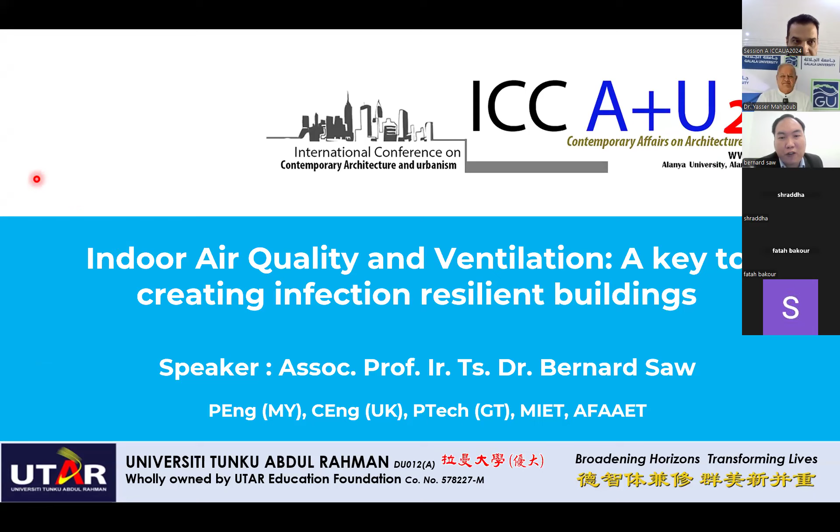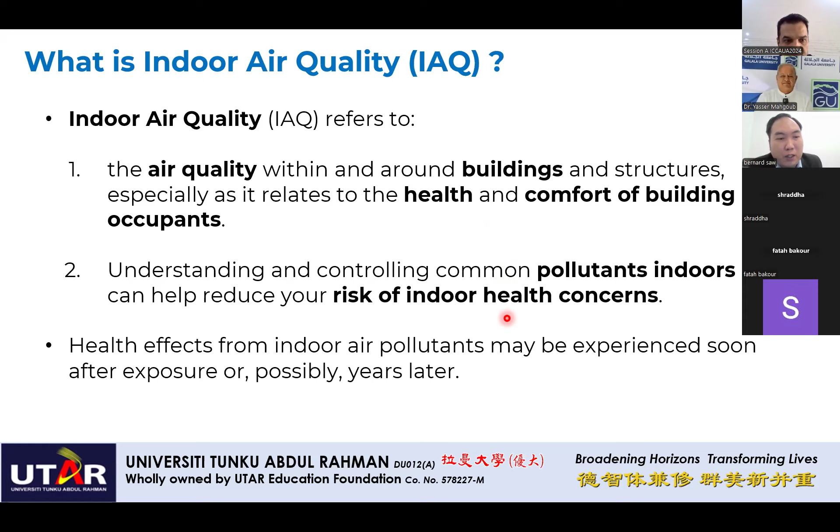Okay, so what is so-called IAQ? IAQ refers to indoor air quality. It's the air quality within or around buildings and structures, especially related to the health and comfort of the building occupants. So it's very important for us to understand and control the common pollutants present indoors to reduce the risk of indoor health concerns. The health effects from indoor air pollutants may be experienced soon after exposure or possibly years later.

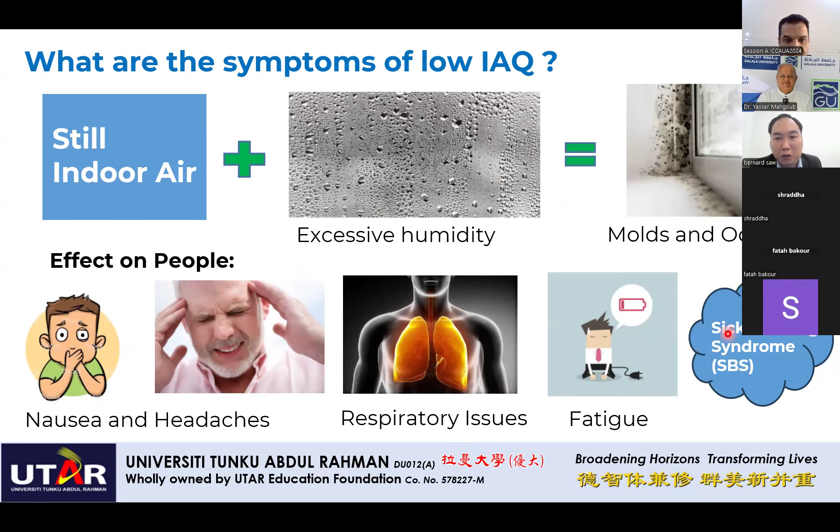So this is a typical example of low IAQ which happened in my country. You have still indoor air, then you add excessive humidity, and you find that mold and odor grow in the building. Subsequently you feel headache, nausea, respiratory issues, fatigue, and some people may experience so-called sick building syndrome. It means you don't have any health issue, but you stay for a long time in a certain place in the building, and after that you develop health issues. That we call sick building syndrome.

Why is IAQ so important? People spend about 90% of their time indoors. And indoors, humans are exposed to air pollution about 2 to 5 times more than outdoors. So it's very important for us to have good indoor air quality to improve workplace productivity, reduce absenteeism of workers and upgrade the investment. There is also a correlation between indoor air quality and low productivity and dissatisfaction among workers.

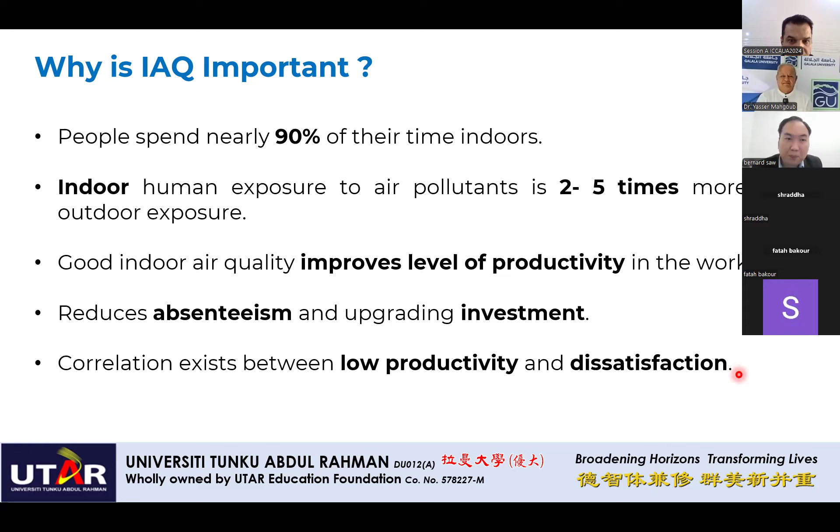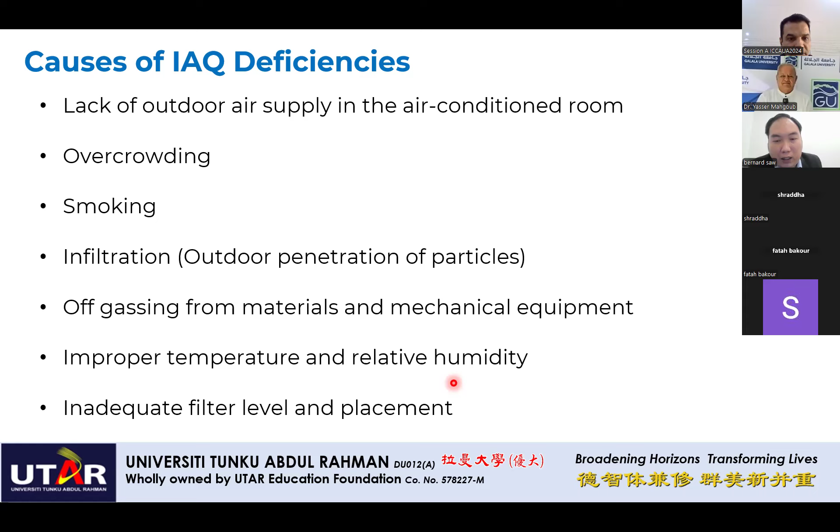So the real causes of low IAQ are lack of outdoor air supply in the air-conditioned room, overcrowding, smoking, infiltration, and off-gassing from materials and mechanical equipment, which typically happens when you have new furniture in your office or home. Improper temperature control, either too cold or too hot, then you lose control of humidity, which leads to the growth of fungus and mold. And inadequate filter level and placement.

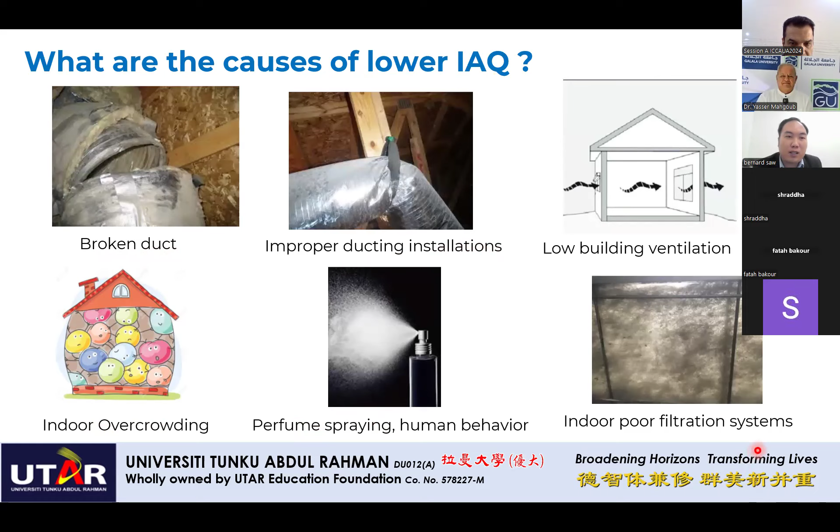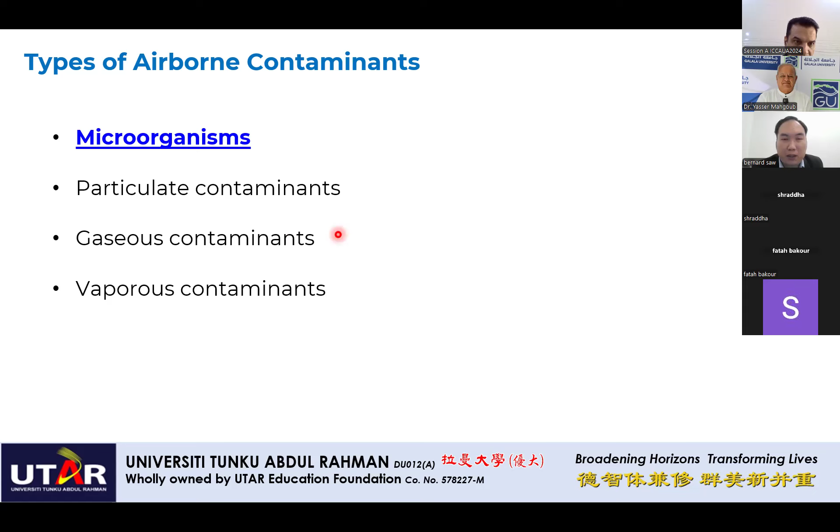These are typical low IAQ cases we found doing building inspections: broken ducts, improper duct installation, low building ventilation, indoor overcrowding, perfume spraying, human behavior, and poor indoor filtration systems. There are various types of airborne contamination: microorganisms, particulate contaminants, gaseous contaminants, and vaporous contaminants. Today our highlight is on microorganisms.

So what are microorganisms? They are usually viruses, bacteria, and fungi. Various types of viruses include influenza, coronavirus, SARS-CoV-2, the common cold virus, and mumps. Bacteria include tuberculosis, which we call TB bacteria, or pneumonic plague. Fungi usually result in mold on the wall, ceiling, and the attic of the house.

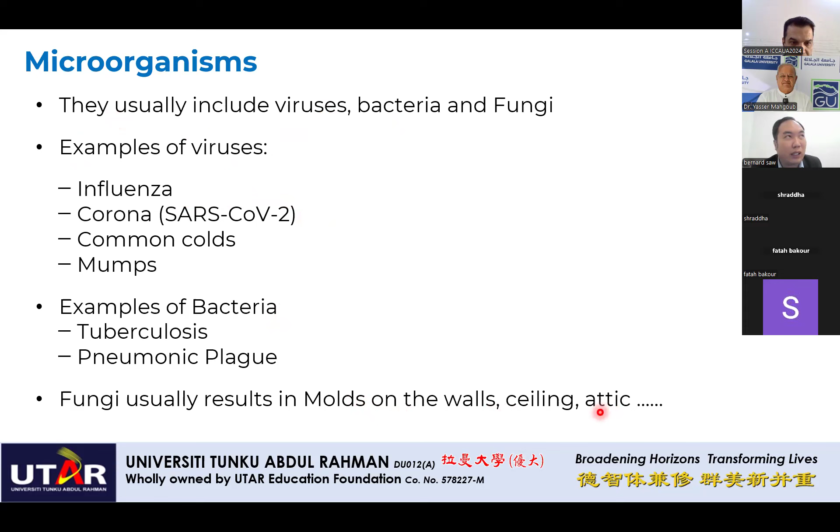So we briefly go through this SARS-CoV-2. I think it's very familiar to all of us when you're talking about COVID-19. COVID-19 is mainly caused by the SARS-CoV-2 virus. It stays for 14 days or more in the body before the symptoms appear. The diameter is very small, tinier than a hair, about 50 to 200 nanometers.

As of April, we have about 700 million cases and 7 million deaths reported. However, some countries are slowly going into the post-pandemic phase and they stop reporting. But nowadays we still hear there are many more cases, and those are the different variants caused by Omicron.

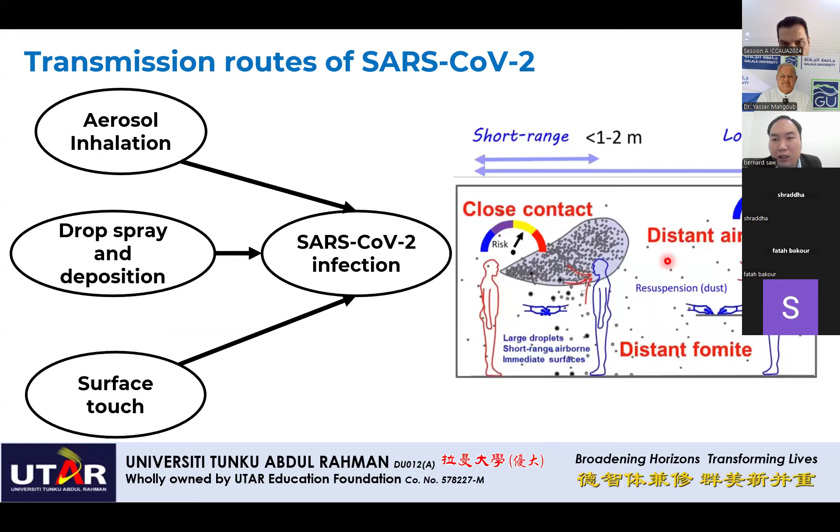As you know, there are three famous transmission routes for SARS-CoV-2: one is aerosol inhalation, then droplet spray and deposition, then surface touch. So you have short range transmission versus long range. Short range is mainly by close contact, and long range by distant airborne and distant fomite.

So in SARS-CoV-2, what we learned, we see these four basic types of observation: close-range dominance caused by inhalation. Most infection occurs indoors, caused by poor ventilation, and outdoor infection is less, due to good ventilation outdoors, and long range occurs occasionally, due to insufficient ventilation. How we counter this is by wearing a mask that can help block the aerosols and provide some filtration. In areas with a high infection rate and heavy activity like singing in a choir, you need a very good ventilation venue or setup.

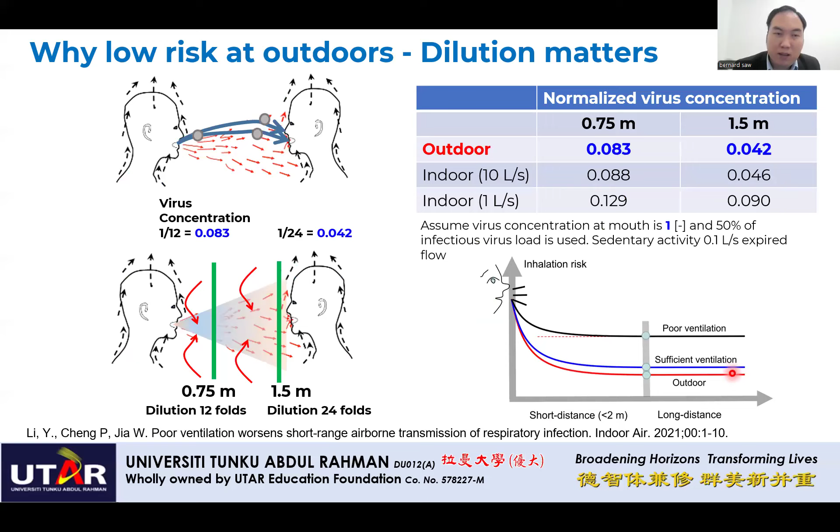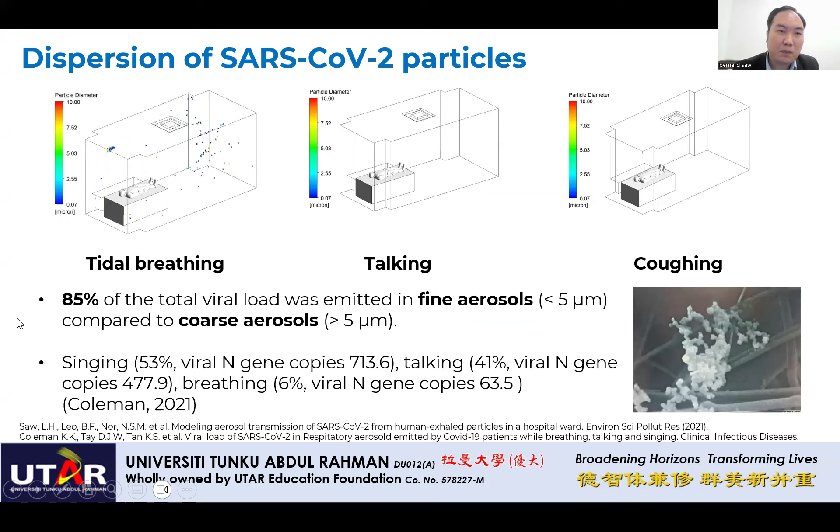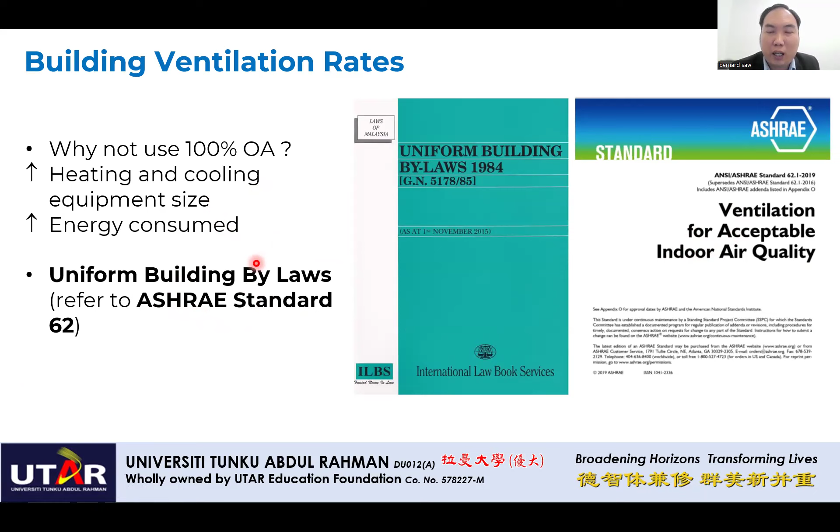In Malaysia, for all buildings, we use the Uniform Building By-Law to construct buildings, and ventilation is guided by the ASHRAE standard. Some people ask, if outdoor air is so important, why not pump 100% outdoor air into the building? There are two main reasons we don't use 100% outdoor air: the heating and cooling equipment sizing gets larger, and the energy consumption is high. So the electricity bill will boom.

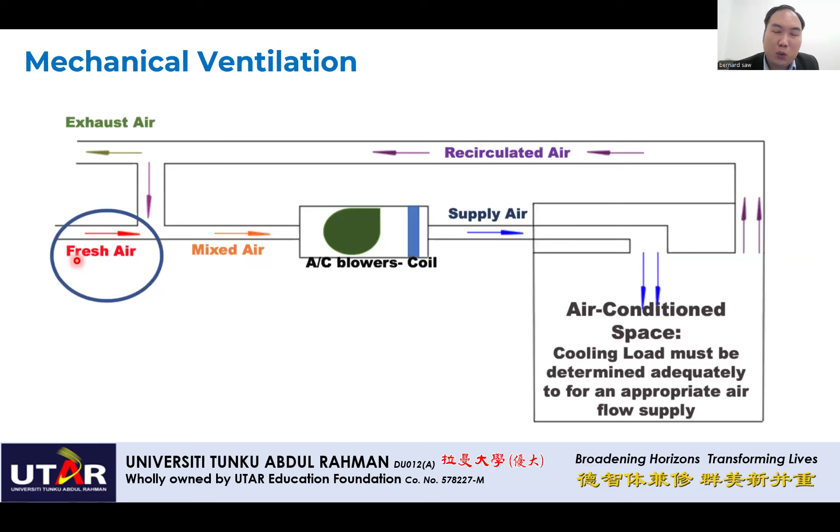In the typical setup for the air conditioner, you see there is a fresh air supply to the air conditioner and supply to the building. The higher the ACH, or air changes per hour, the less time required to remove a contaminant indoors.

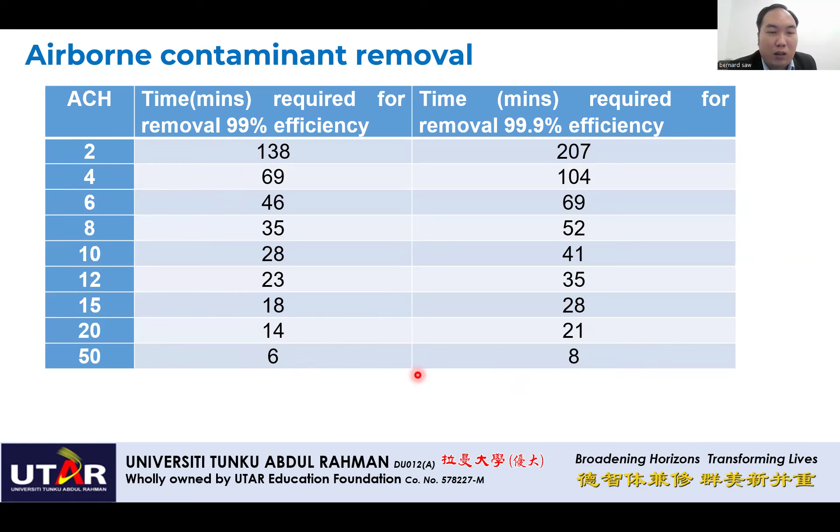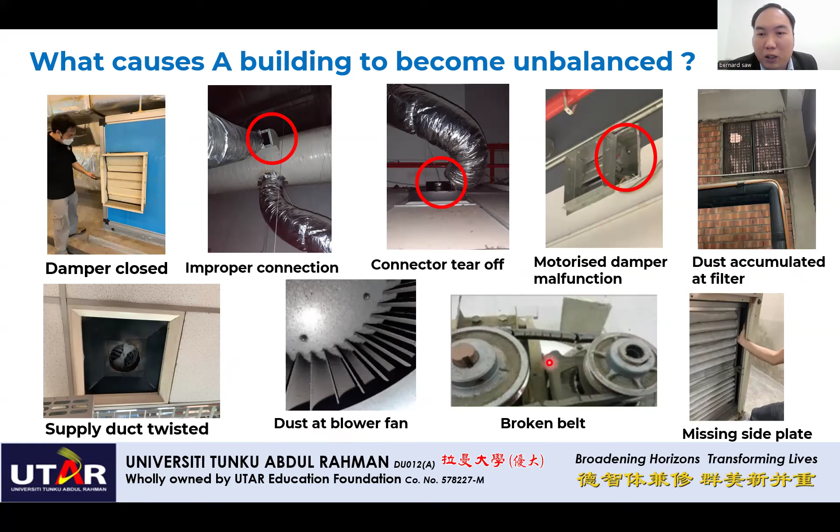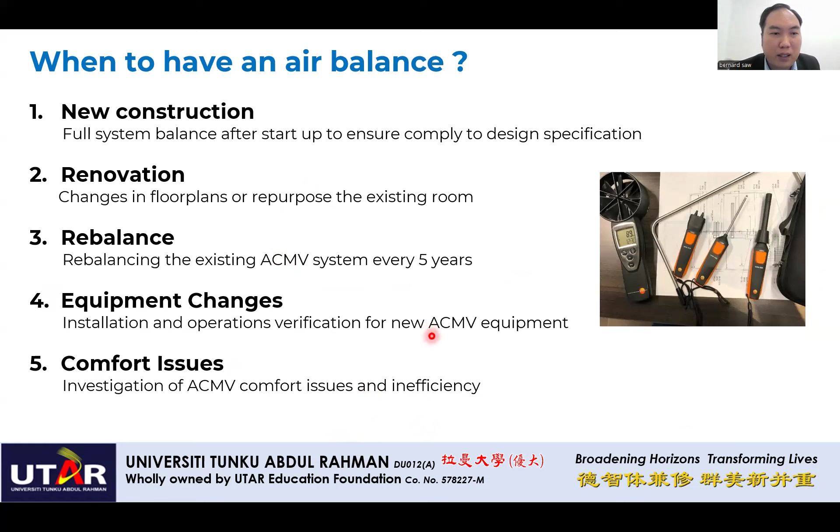These are the common things you find in buildings with poor IAQ. So it's very important for us to do the balancing of the air conditioning and the ACMV, for new construction sites, and when doing renovation, rebalancing, and equipment change, when the building has a comfort issue.

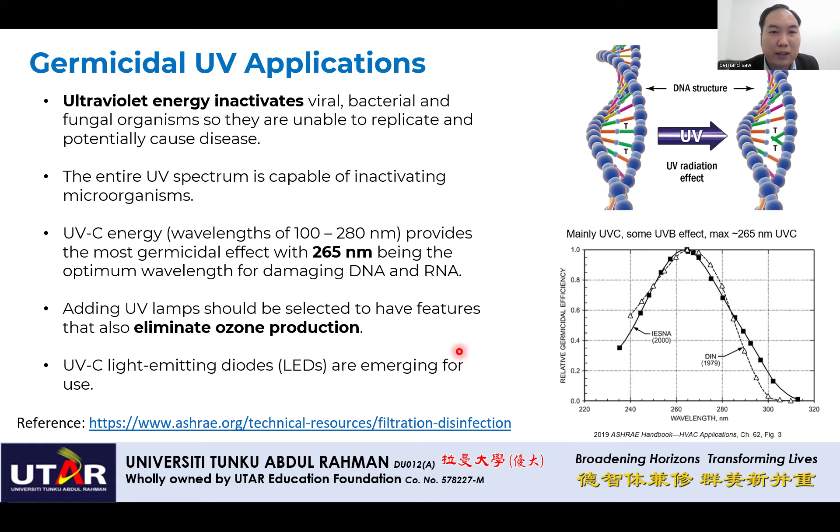So next we move on to UVC. UVC is not that strange for us. Some use UVC 254 to deactivate the virus - I shouldn't say kill, the more appropriate term is to deactivate. It's used in in-duct air disinfection, upper air disinfection, in-duct surface disinfection, or portable room decontamination. This is a typical upper room UVGI installed in an office.

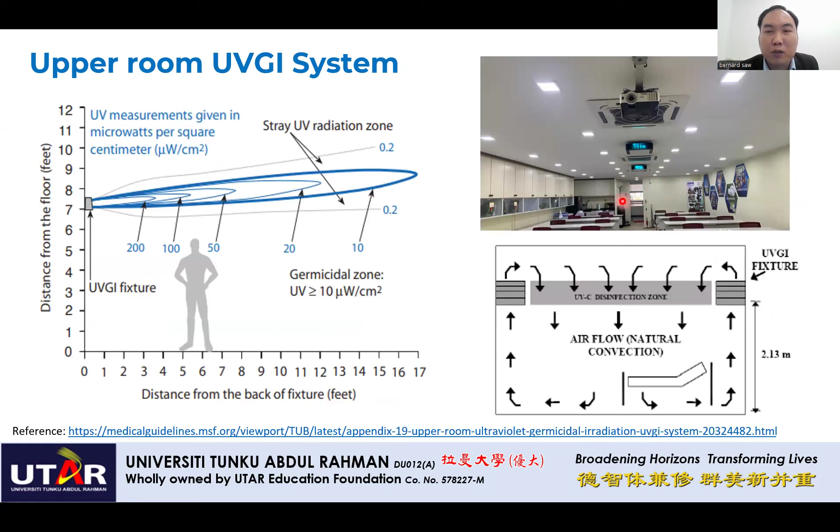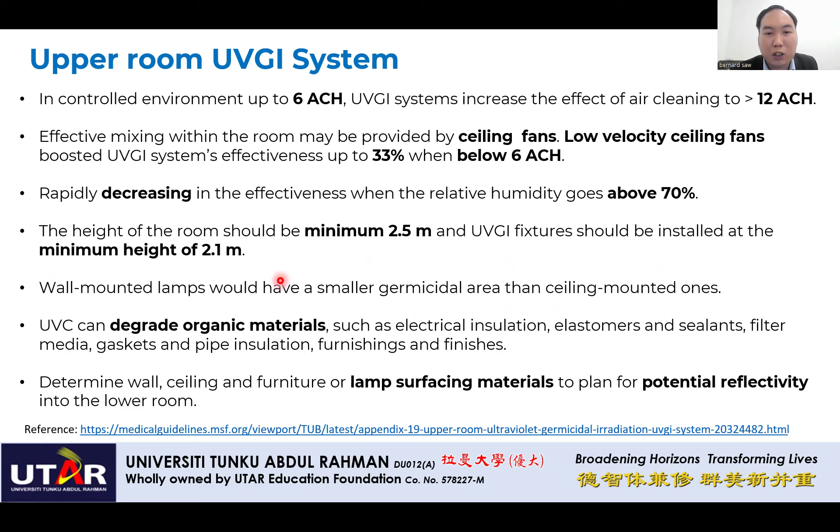This can provide additional air change to the building. Minimum height should be 2.5 meters, and the UVGI is installed about 2.1 meters, above the head of a human. The safe exposure for UVC 254 is about 0.2 microwatt per centimeter square for 8 hours.

Another thing we look at is far UVC 222 nanometer, which was promoted during COVID time. This UVGI 222 nanometer is produced by the krypton chloride excimer lamp. A 12-watt lamp will produce 0.05 ppm of ozone in 30 meters cubed of room in 267 hours. So it's very important that if you install this UVC 222 nanometer, you ensure sufficient outdoor air supply, otherwise you'll have an ozone issue.

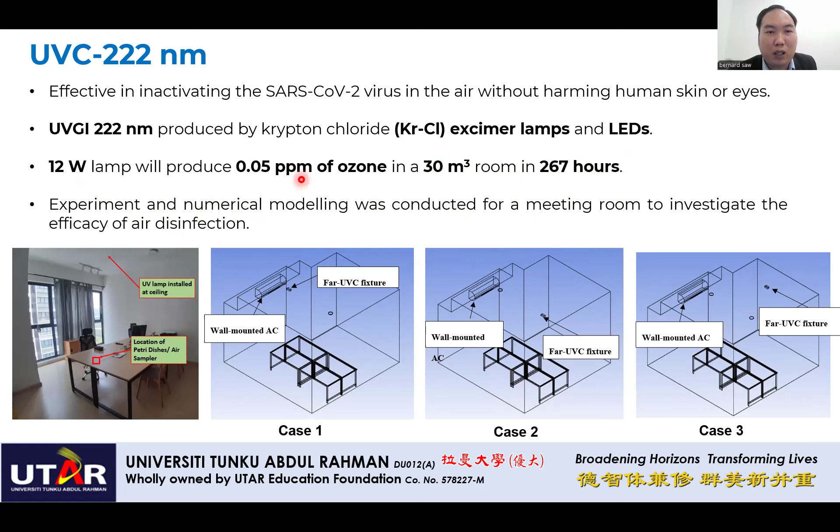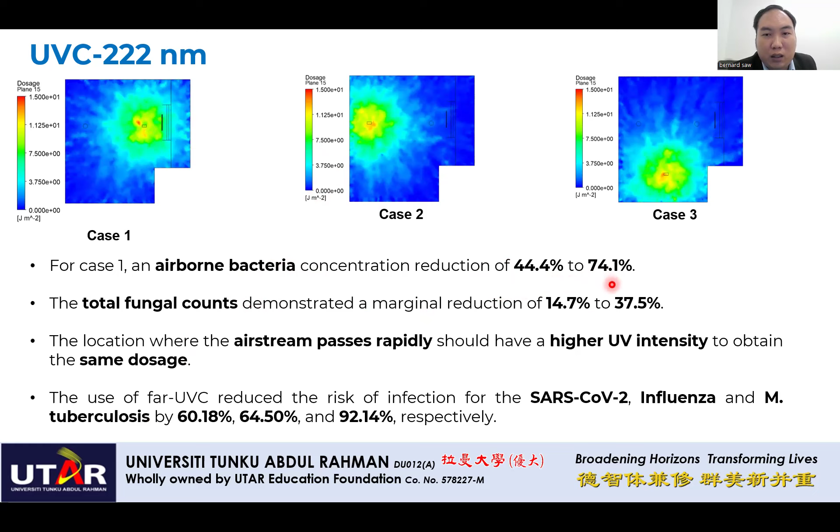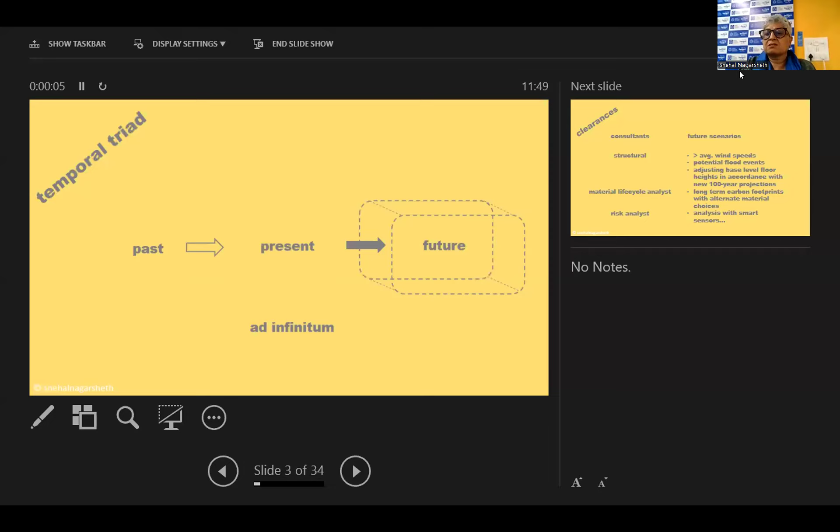I will be talking about three aspects of my work: one is academic thought, academic work, and practice as an academic. And I will begin with the ideas that contribute to my work and practice.

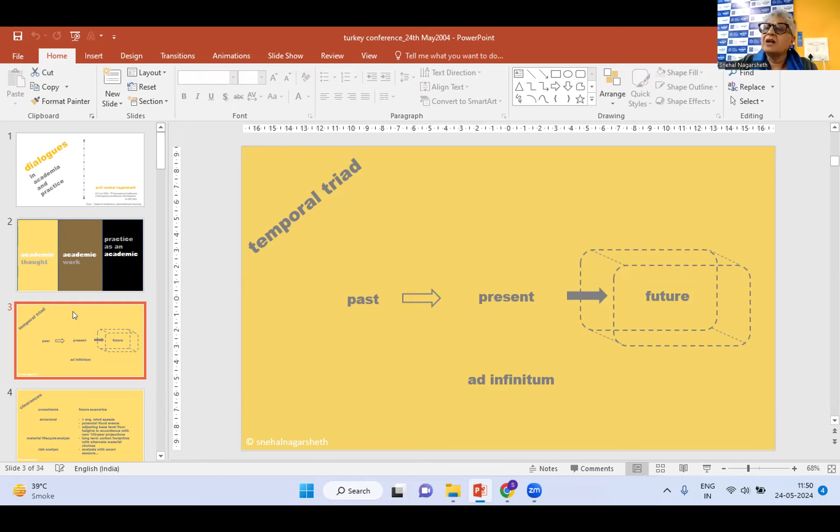So I look at architecture as an infinite triad, a temporal triad of past, present, which feeds into the future. And we've been going through this cycle forever and ever.

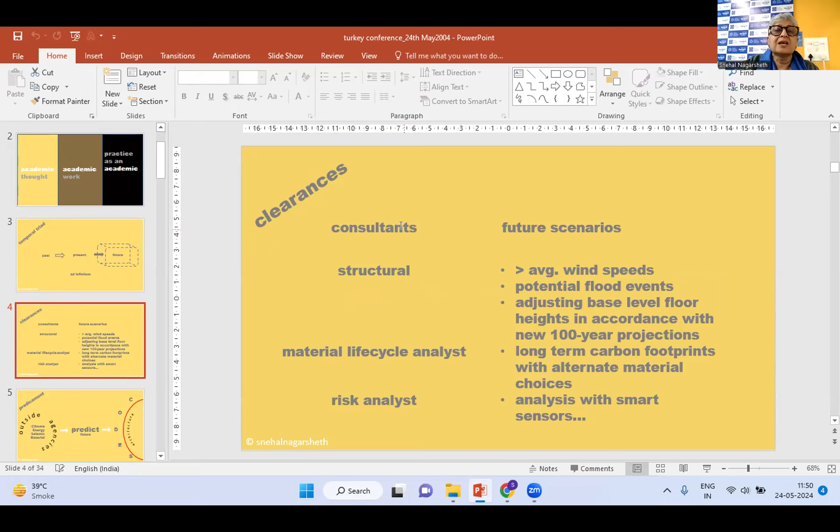If I look at the scenario of architectural practice today, we realize that we look for a lot of clearances, and many of these clearances come from various different consultants, who are looking at greater than average speeds and potential flood events. So they're creating these future scenarios for us, and all of these are actually clearances that we need to get for our work.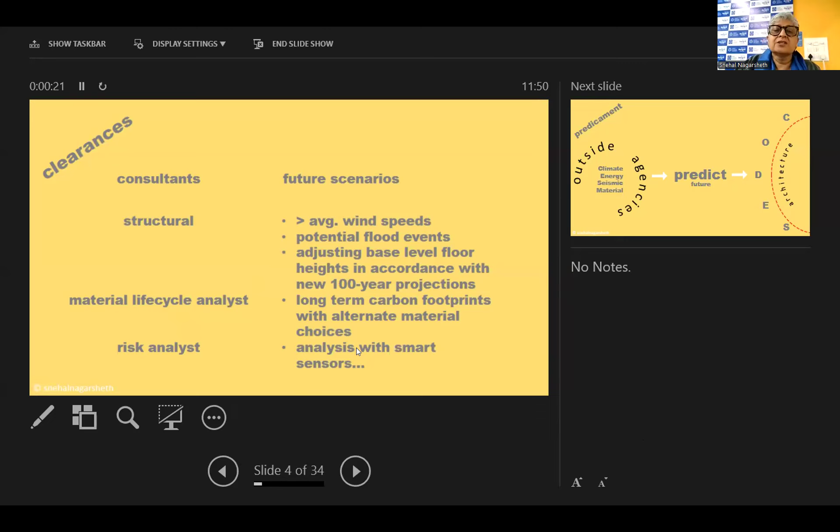If we look at the predicament we have, there is climate, energy, seismic, material—all these agencies predicting futures and creating a body of code that architecture today answers. So architecture has sometimes become a servicing position rather than looking at it as a situation which depicts the future, like we used to do in the past, where we actually created the future for everybody.

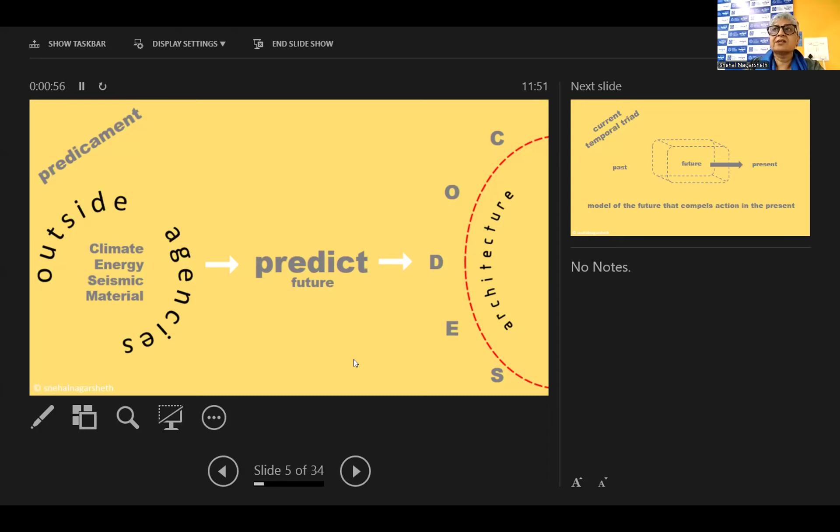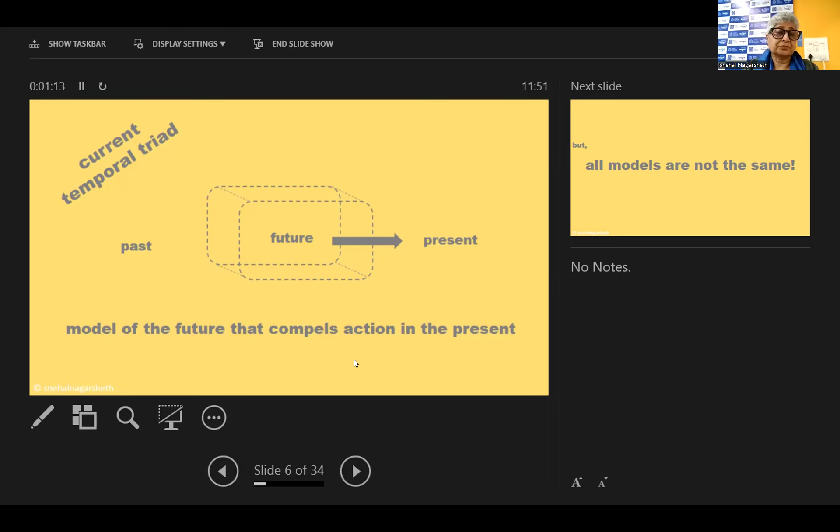So today we have a situation where past exists and future is dictating what the present should be. The model of the future is compelling our action in the present, as I showed. With this thought, I realize these models can't be the same, and we cannot be functioning like this.

So in my academic journey, in my design work, I create a studio which looks at imagined scenarios—looking at the development around Ahmedabad, around this little lake. We are looking at how scenarios can be built from within architecture, and whether we can have imaginations that create new codes with new developments and new thoughts that emerge from architecture.

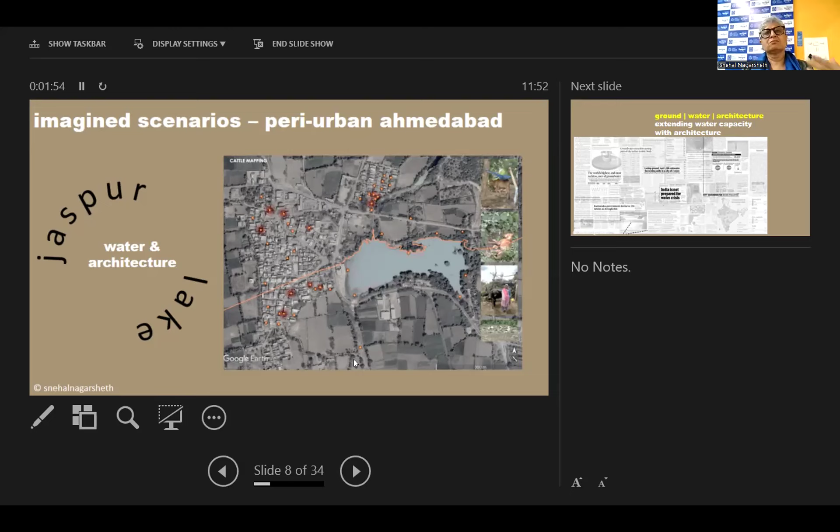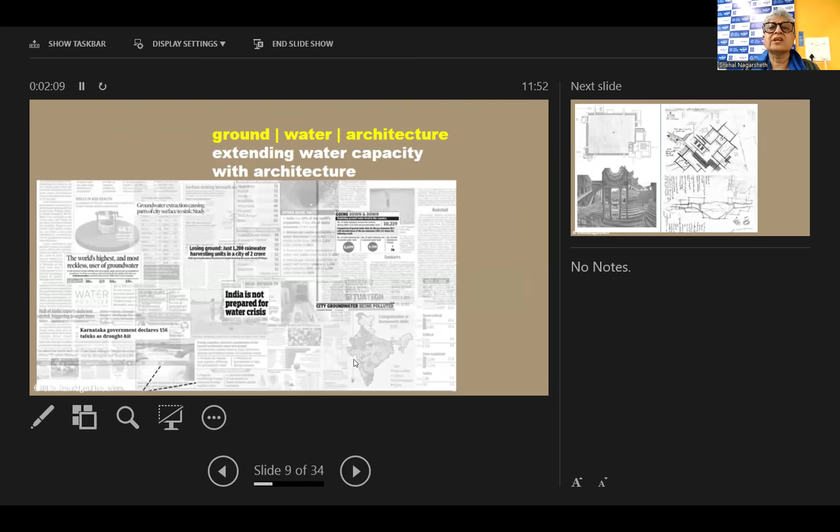So the student projects questioned the fact that today we do not build new water structures as architecture, we only build them as service. Can we create a new architecture that looks at building new water reservoirs, which are actually public places? That was one stream of questioning.

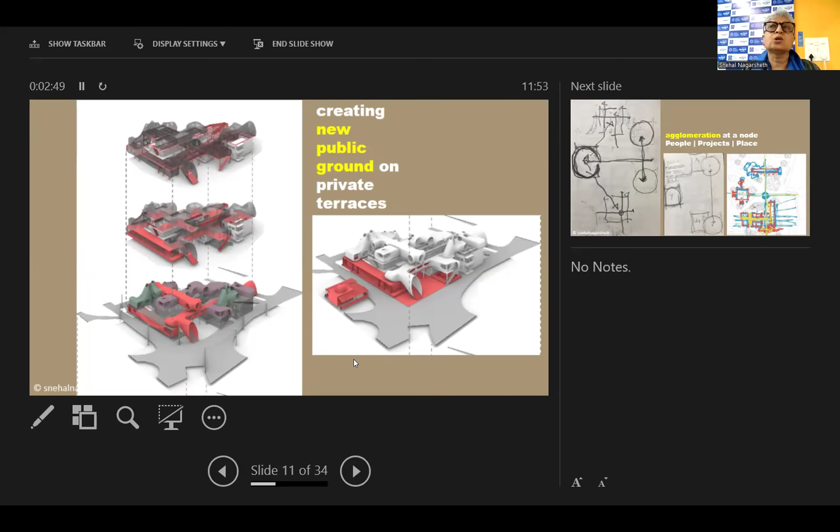The second stream of questioning that the student work took ahead was creating a new public ground, looking at disparate individual projects and individual houses—can there be a new public ground which sits on top of these private terraces? His imagination took hold of an almost parasitic development that occurs on top of individual terraces.

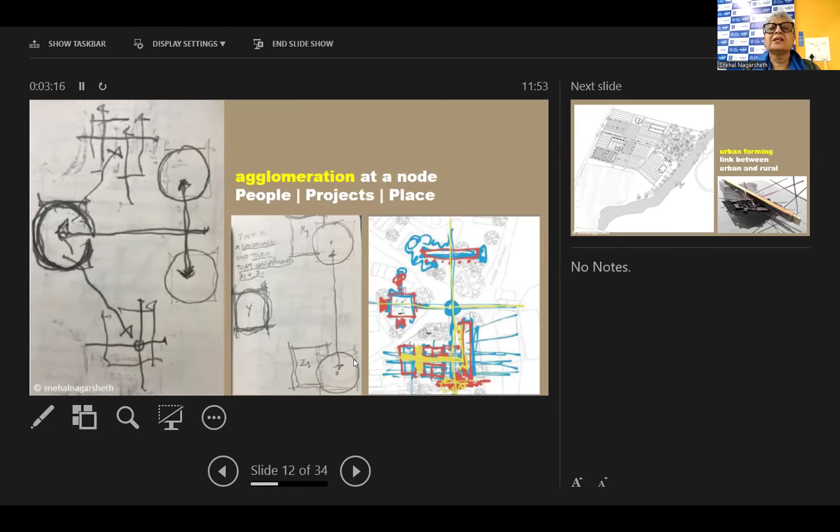The third one looked at the current urban ground which the roads have taken over. She wondered whether we could pedestrianize paths, and when we have public projects on three ends, can we create a node to agglomerate an idea of a public place, and can that become the new imagination for this village?

The student was looking at urban farming as a link between urban and rural. He was looking at whether urban farming could continue our engagement with nature and with farming, which we are actually usurping with new developments. His idea was, can we create nodes and typologies of urban farming in the newer developments of such villages around the city?

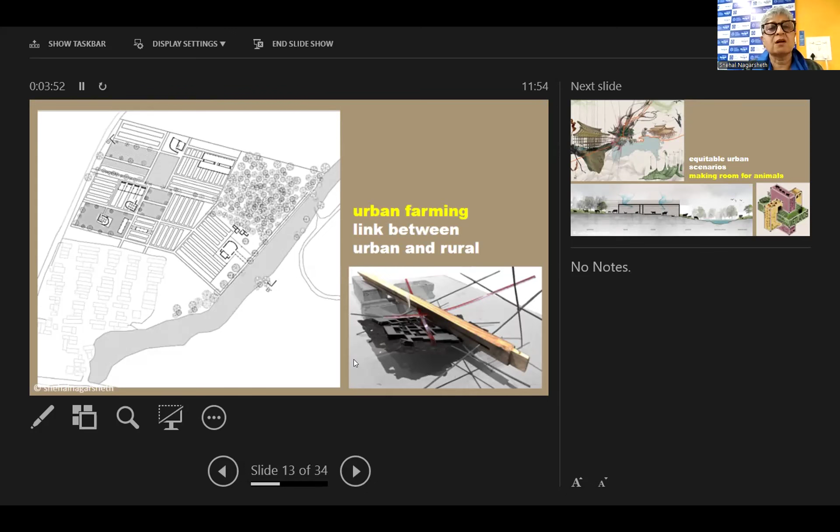She was looking at an embracive idea—the working of the animals—and creating them as part of our continued engagement with urbanizing, not seeing them as invaders into our city, but as part of our city. So she was trying to look at an equitable urban scenario, looking at the idea of animals.

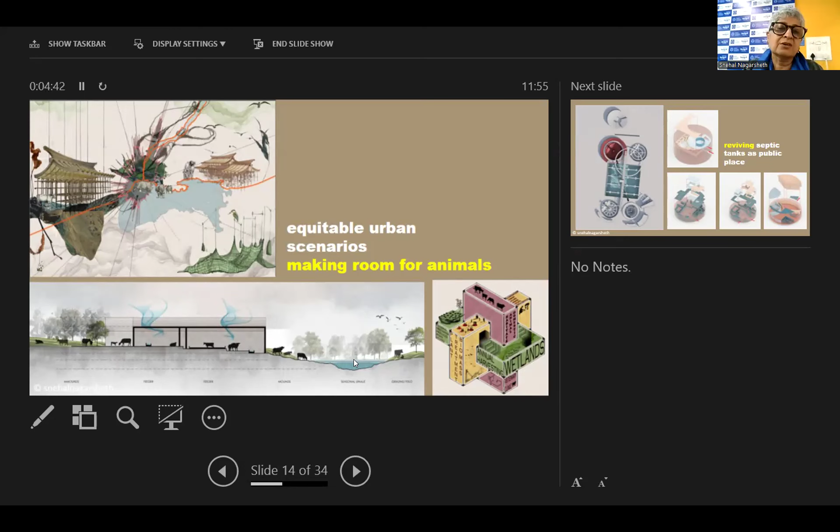In this village there was an animal husbandry unit. She thought, can it become larger, and can it actually become a place where people come, feed the cows, and understand the whole process, creating a new place as the city develops, rather than just having it for the roads and for human beings—creating an inclusive architecture for all.

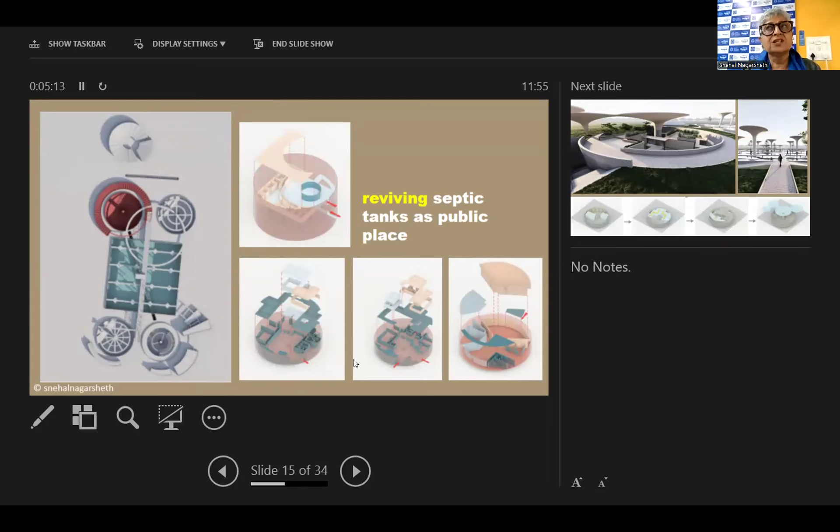We were looking at reviving various kinds of septic tanks—this was a defunct septic tank—and he wondered whether this could become a method of making people aware of the water crisis, also using this large body in the middle to create a reservoir, and create other amenities for the village. When the village gets absorbed into the city, it creates new urban amenities and scenarios, which look at the septic tank as actually the urban future.

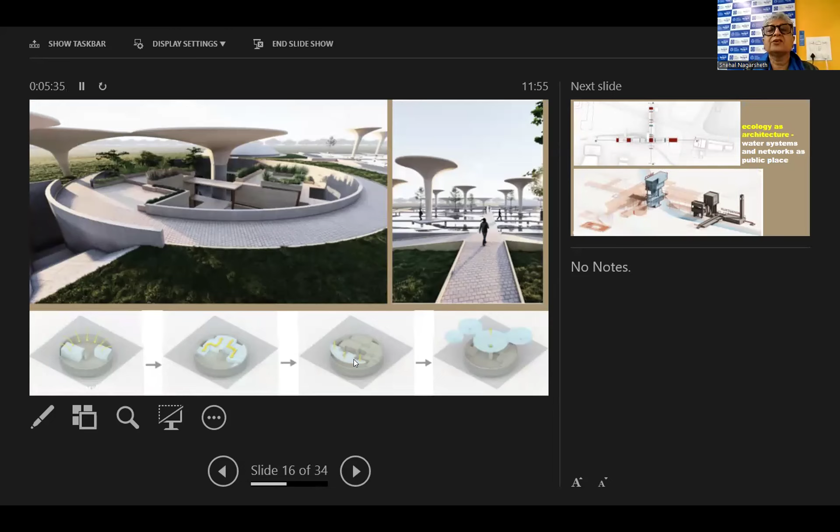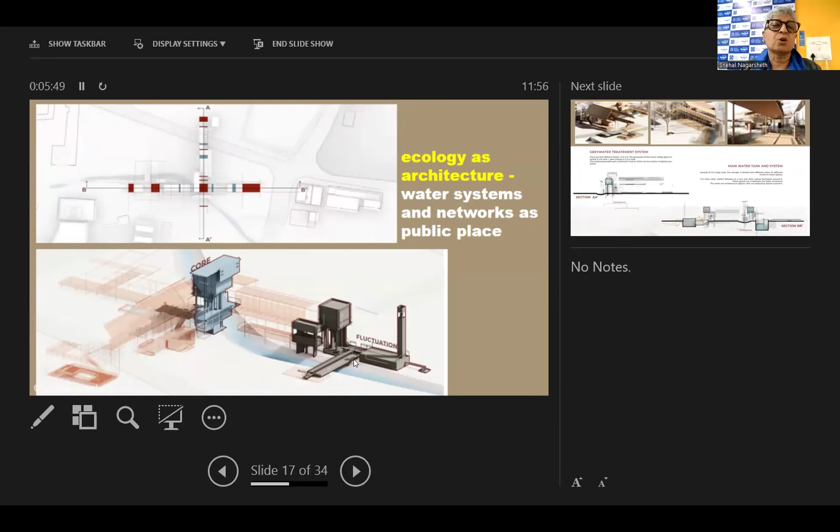So his project looks and creates a monument of collecting water and creating this urban park. The next student looks at ecology as architecture and looks at water systems and networks as public places. He kind of looks at the idea of current water systems and creates them as monuments and part of the newer development that will probably progress and densify this whole village and create newer marketplaces, more places which are public at the upper level, and create connections as we take this step forward in development.

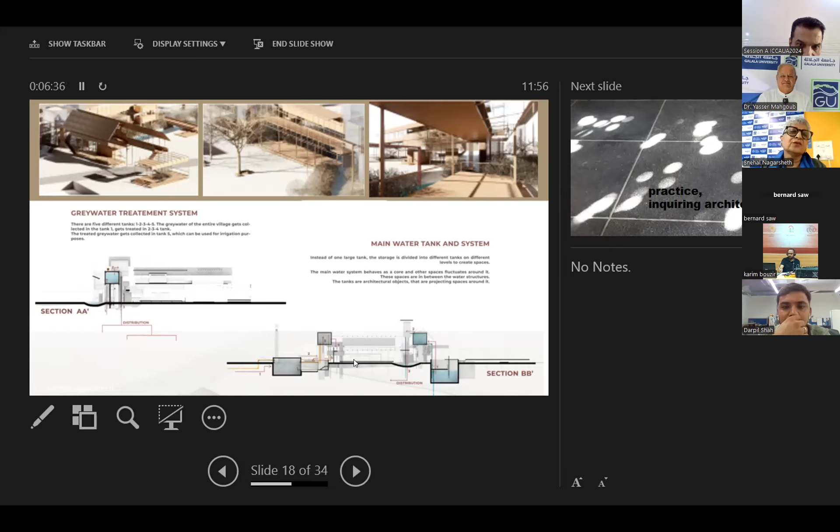And we have such villages all around Ahmedabad, and they're all developing, and such conditions are happening in all the tier 2, tier 3 cities, and that is what we will have to look at predominantly. But if architecture doesn't take a step forward and creates its own future, we will only be answering the future of others' imaginations, other consultants' imagination, because they are also imaginations. They are not reality. They are imaginations of a future.

So the idea that we need to really question ourselves towards our practice as well is the fact that, are we really going to just answer the consultants from outside, or create an architecture, an architecture that questions the current scenarios from within?

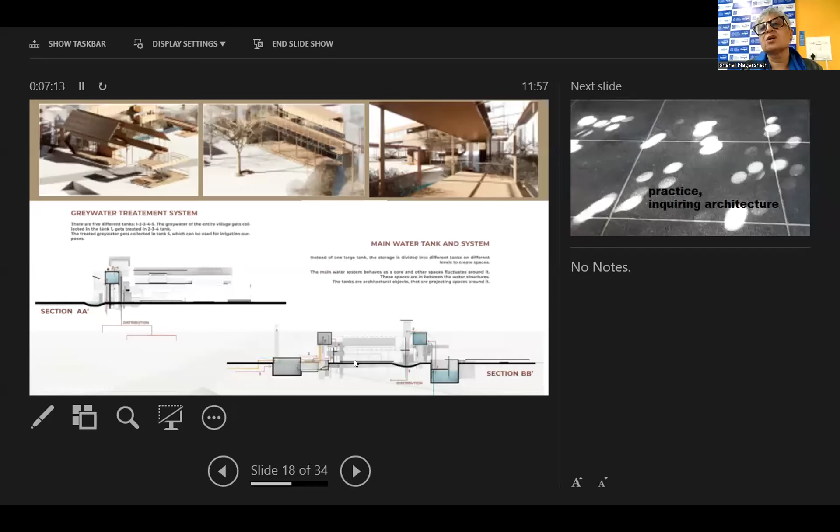And with this, I would like to take you to a small journey of a practice. My practice is actually very small. I'm going to showcase one particular project, just one house, which sits in Ahmedabad, in the newer part of the city.

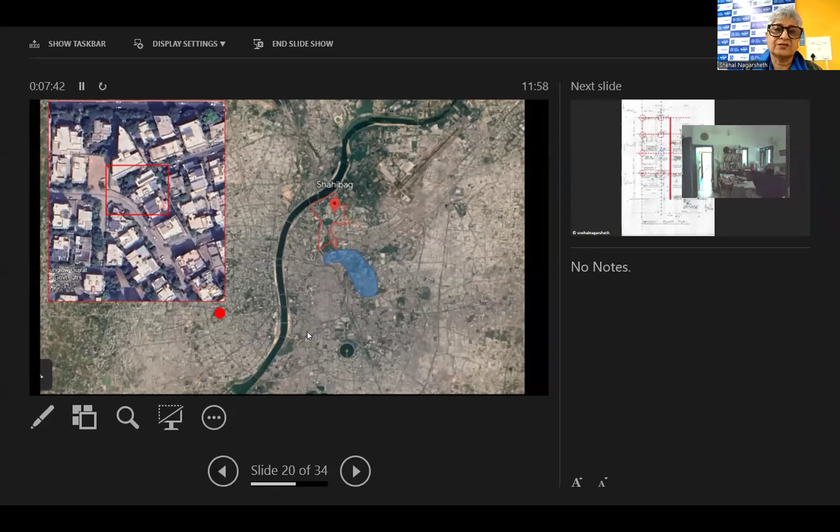This area is considered to be the old city of Ahmedabad, which has very traditional houses, while the newer city developed on the western side of the river. Currently, if you look at it, it will be to your left. So there was this old house that was sitting there.

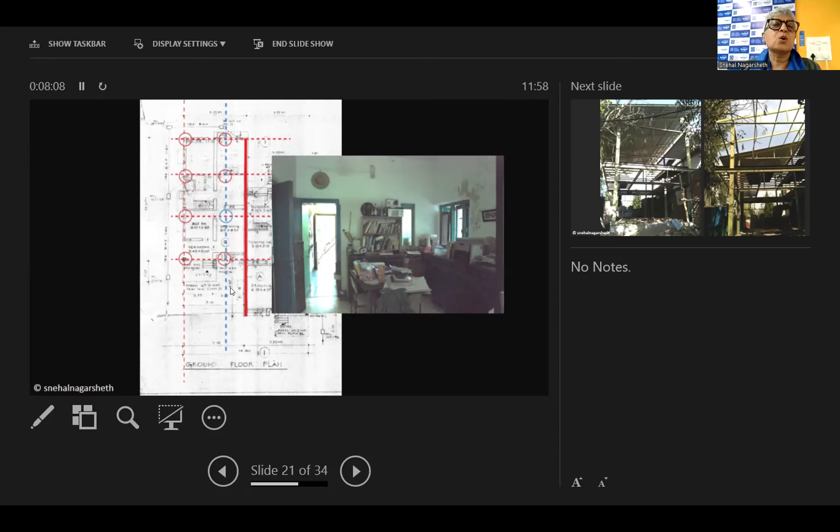And when one was looking at creating a new house, one was trying to figure out how does one save material, and how does one look at this house with the idea of making one's own house, which is developing, but also looking at sustainability as a great factor. So the house came up on the existing plinth as is, and used the foundation of the house, and created a shed on top of it.

So this shed that is there is a ubiquitous shed, which probably one can erect in 7 days. And there's nothing much to it. All the foundation was used as is. So we didn't dig up, we didn't build anything.

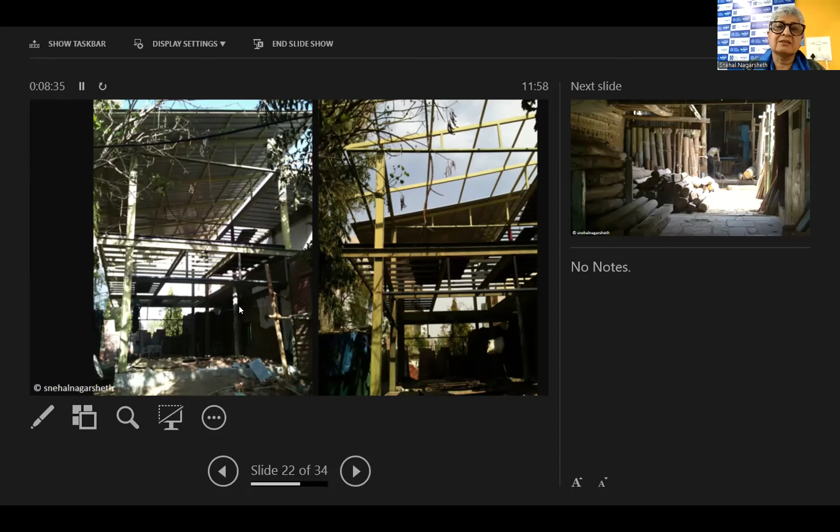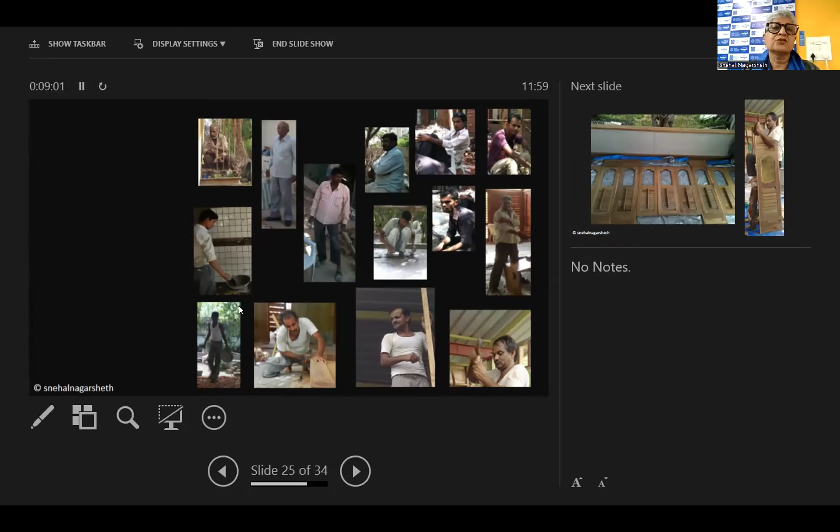The idea was that we were looking at saving and reusing wood. So this is where wood is collected all over from various old houses. I collected something like 100 windows. And these are the craftspeople. So the architecture also became a place for craft.

It looks at the idea of a building with components which are 90% reused, and we used a whole lot of people to construct it. And no water was used in the construction. Thank you, I'm done.